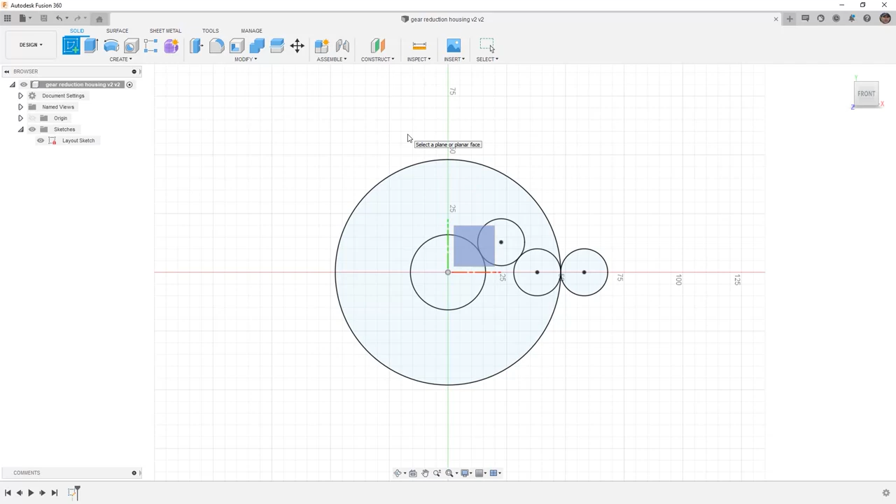In Fusion 360, we want to carry on with our gear reduction housing. We're going to get started by creating a new sketch, once again on the front plane. From here, we need to make sure that we can reference some of the values that we've already created. We still have our layout sketch shown, but we're going to use the option to create or project them as construction geometry in our current sketch.

So we're going to select Project or P on the keyboard, and we're going to select each of these items. Once we have them all selected, we'll say OK, and then we're going to hide our layout sketch. You'll notice that they're displayed in a different color. They are still able to be used for things like extrudes as solid geometry, but what we've done is we've created them as a projection into our current sketch.

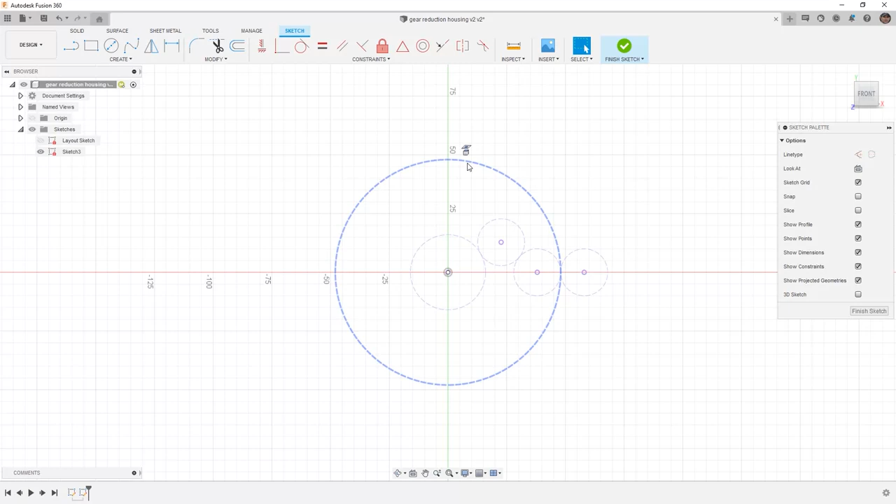If we want to turn them into a reference-only type of geometry, we can select them all and use the line type construction. When we left-click, you can see now that they're dashed, and they're projected but only as construction references. This means we can no longer select their closed profiles for things like extrudes.

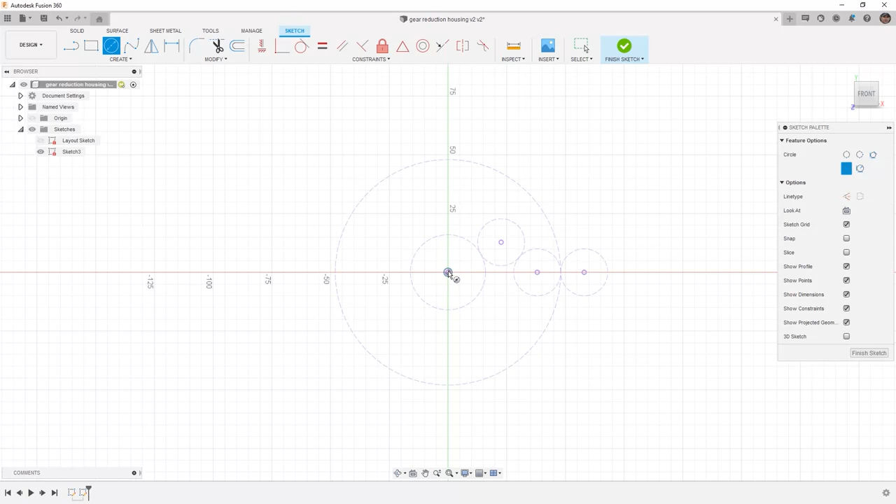This is a great way for us to bring specific sketch entities from other sketches or even solid geometry into our current sketch. This way we can begin to create the layout of our housing assembly. We're going to get started by using our center diameter circle, starting from the origin. We're going to begin dragging this out slightly larger than our projected reference. We're going to draw a secondary one larger than that.

We're going to begin again by going to the origin and drawing a circle that comes to about 70 millimeters. And we're going to draw one at the outside of our last or third idler gear. We're going to drag this one out, and it's going to roughly go through the center of the second idler gear, but we want to make sure that we don't actually snap to any geometry. So this is going to be about 37 millimeters.

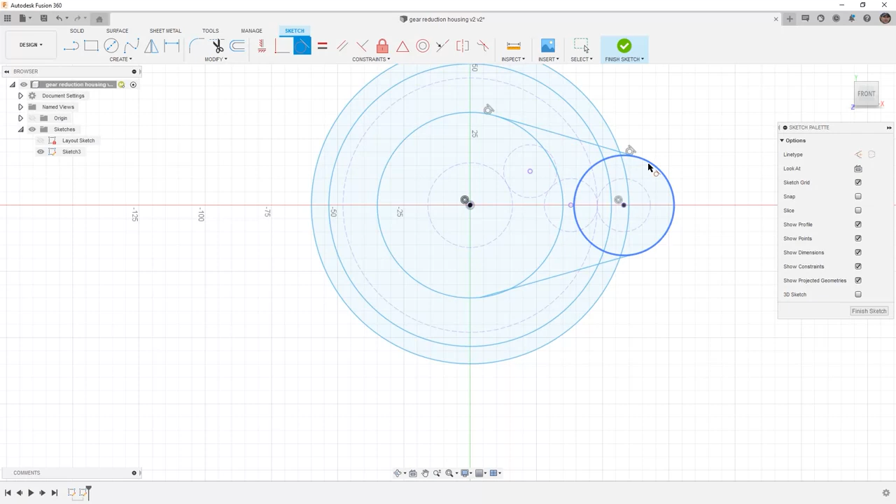From here, let's go ahead and use our line tool to go between these two sketch entities. Once again, we'll zoom in to make sure that we're not creating any additional references. And then if you accidentally select, you can right click and hit cancel and restart your line tool. But we want to make sure that we're creating tangent references between these two outside circles. We can add that as a constraint by selecting the line entities and the circles. And we'll go ahead and do this for the bottom one as well.

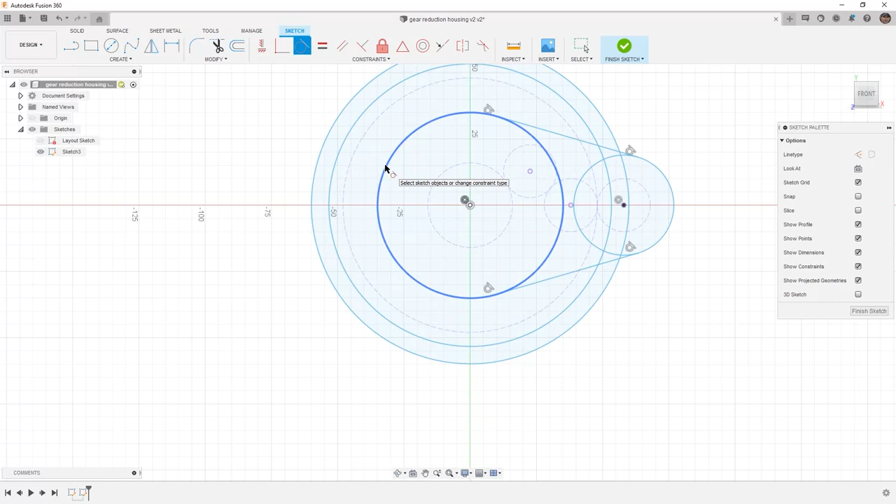This is going to be a portion of our housing that encloses the idler gears as well as our driven gear on the front side of our housing. So in order to make it as aesthetic as possible, we're going to use these tapered lines and make sure that we can include enough geometry to encompass all of the various idler gears. Now that we've got some of this laid out, let's go ahead and add some dimensions.

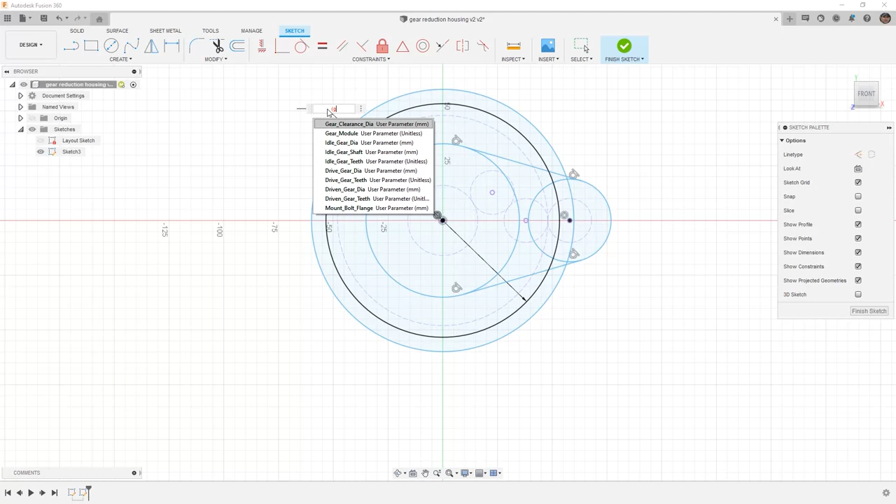To get started, I want to add a dimension to this inside circle here. I'm going to left click to place the dimension, and then I need to define what this is. In order to do this, I'm going to start by having an open bracket, and I'm going to start to type in my gear list so I can start to see what I have inside of my parameters. So remember that we're dealing with the drive gear in this case, which is the largest gear. So I'm going to select my drive gear diameter, which is 96 millimeters, and I need to add to that.

So in this case, we have a parameter called gear clearance diameter. That gear clearance diameter is 4 millimeters, and that 4 millimeters allows us to have just enough clearance for the outside edge of the teeth of our gear. Now, just enough is not going to be good for us. We want to make sure that we have a little space, especially if this housing has grease or there's any additional components that go in here. We want to make sure that we have enough clearance.

So instead of just simply adding that 4 millimeters, we're going to say plus and add more brackets. And this is going to be our gear clearance diameter value, which is 4. And I'm going to multiply that by 2. And then I need 2 brackets to close this off. Going to hit enter, and this should give us a value of 104 millimeters. So once again, we're using that gear diameter, which we know is 96 millimeters, and we're adding 2 of our gear clearance diameters to it.

The next thing that we want to do is we want to define the size of this geometry here. Now, when we do that, there's a couple different ways we can do it. Once again, we can define it as a diameter, or we can define it as a relationship to something else. So in this case, I'm going to create it as an offset.

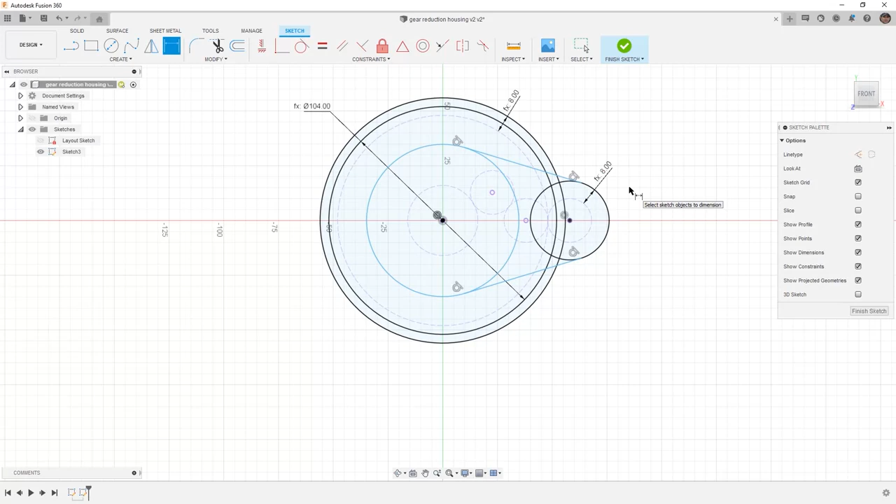So now that we have those two defined, let's go around and let's add a few more. This value here is something that we don't really have a parameter for. We're just going to have to use some of the other parameters to help define it. So we're going to start on the right-hand side, go between these two. And once again, I want to use the gear clearance diameter. I'm going to multiply that by 2, giving me 8 millimeters. Since I know that's not going to work on this side, I'm going to use that same value, that gear clearance diameter, but I'm going to multiply it times 4.

Once again, I don't really have a value for this because we're just creating a sketch that has enough geometry to encompass our idler gears. So basing it still off of that original value means that if we modify the diameter of our large gear, our drive gear, all these other values are going to update accordingly. So that's why I want to make sure that I use a relationship to that gear clearance diameter.

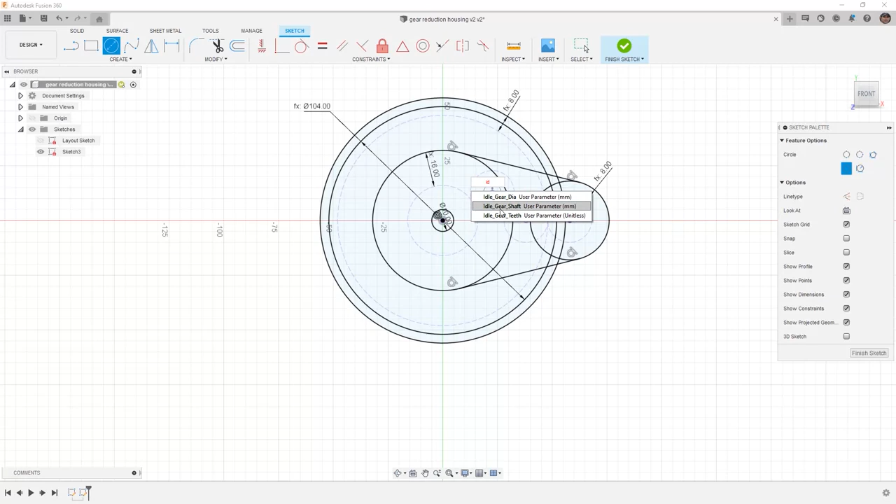Now that we have these set, let's go ahead and use our center diameter circle tool, and let's add some center diameter circles. I know that I want my input and output shafts to be 10 millimeters, so I'm going to manually enter that value. But then I want to place some more center diameter circles, and these are going to be using our idler gear shaft values. That's going to be an 8 millimeter value. And again, we're going to just go ahead and click to place that. And if you forget, you can always go back to your sketch dimensions, apply that dimension, and then simply select the correct user parameter and hit enter on the keyboard.

Now that we have our center diameter, the clearance for our shaft, and then the shaft clearances for the various idler gears, what we need to do is create the mounting point locations. In order to do this, we're going to use a center diameter circle, and I'm simply going to place one in the bottom right. And I'm going to place 2 at the exact same location. I'm going to do this over here as well. I'm going to place 2 at the same location, making sure that they are concentric, and then I'm going to hit escape on the keyboard.

In order to find the location of those, I'm going to use a line from the origin to the center point, and I'm going to do the same thing over here. I'll hit escape, and then I'll convert those lines to construction. These are only going to be references for adding dimensions. So I want to make sure that I create these references. In this case, I'll add a vertical line. We'll hit escape, and then we'll convert this to construction as well. So now we have a vertical reference, and we have this angular reference here.

Since we left this under constrained, we can move it around if we want. But in the end, it's not really going to matter where that line is because what we're going to be doing is creating a dimension from it. So using our dimension tool, going from our vertical line to this line here, we're going to drag it down and add a 45-degree value.

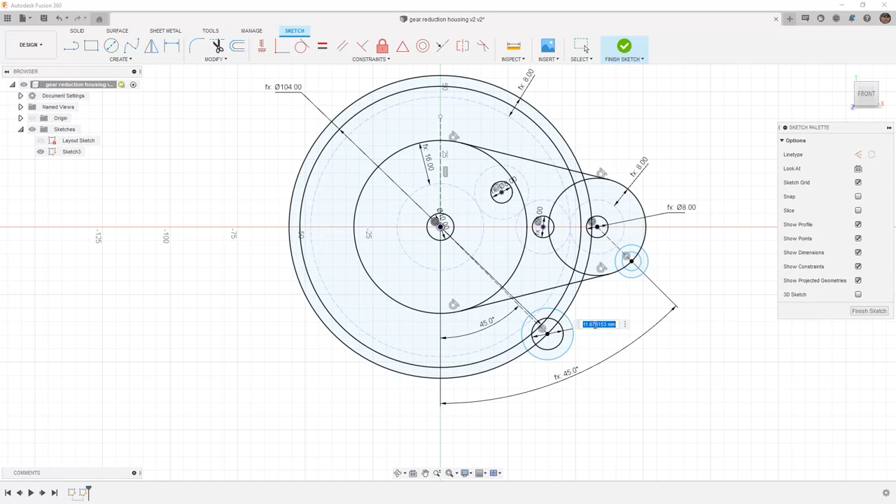Now we need to define what the diameters are going to be. In this case, I'm going to select the inside, and these are going to be our mounting bolts. So we'll hit M on the keyboard, and this is mount bolt, and I can hit enter for that. And I'll do the same thing over here, mount bolts, and we'll hit enter for that.

Now we need to figure out the offset that we need, because this is going to be the center of the bolt going through, and we need to figure out how big the rest of this is going to be. Well, we don't really know at this point. We haven't picked out hardware. So I'm going to manually enter a value of 2 millimeters. And I'm going to do the same thing over here, but I'm going to select that original 2 millimeters. So once again, I only have to change it in one place.

So I'm going to hit escape to get off my dimension tool and take a look at what I have so far. Now that I've added a few different things, I'm going to show a few more tools that can be extremely helpful when we're creating these parametric sketches. I'm going to add a couple more sketch circles over here, and I'm going to hit escape. Then I'm going to take a look at my symmetry constraint.

When we have a symmetry constraint, we need to select our entities. First, we're going to go our first entity, our second entity, and then we need to select a mirror line. And we don't have one in this case. But if I select this vertical line, notice that it moves it all the way over here. We do the same thing to the inside ones, and then we select that vertical line. What we've done is we've added symmetry across that line. Let's hit escape on the keyboard.

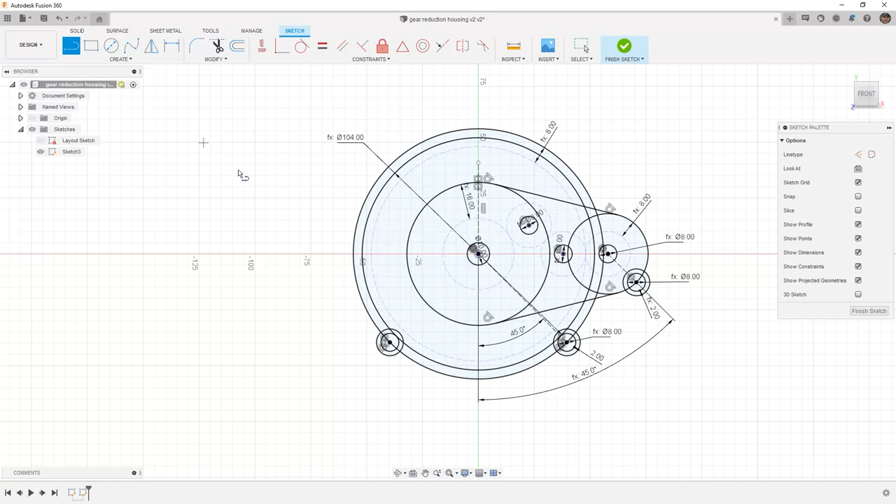Let's create one more line, and this time it's going to be horizontal. We're going to select it, convert it to construction, and then we're going to use the mirror tool. This will allow me to select all of the different elements that I want to mirror. And then I select my mirror line and say OK. And now I've created all of those fully constrained and fully defined sketch elements that are parametrically linked, meaning if I change this value to 4 millimeters, all of them are going to increase. If I change it to 2, they're all going to decrease.

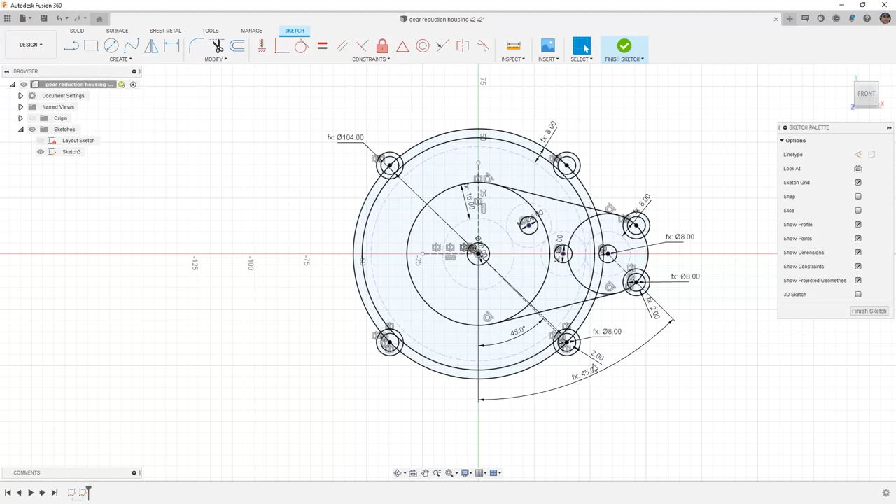Let's make sure that we finish this sketch and take a look at what we've done. We've added a lot of references, we've added a lot of parametric relationships, which means that we can always go back to modify, change parameters, and we can make adjustments to any of our values. Let's go ahead and minimize this so we can see.

If we take a look at our drive gear teeth, and I change this to 60, everything updates, but you'll notice that there are some issues because of the tangency between our idle gears. If I change it back to 48, notice that it doesn't go back to the original location, but it does satisfy everything that we've done. So making those adjustments can update our sketches, but we do have to model in a specific way to make sure that all the updates take place.

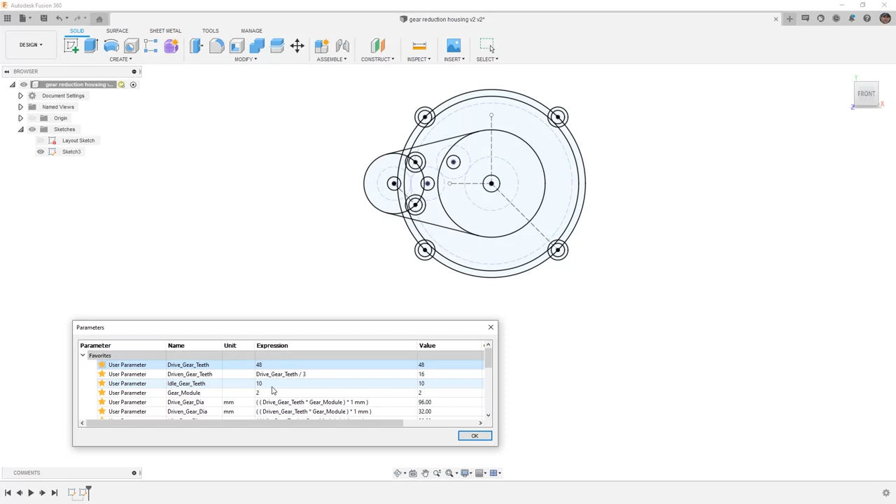Because the drive and driven gears have that 1-to-3 relationship, they'll update just fine. But our idle gear was manually entered, and that value does not change based on any of the other parameters. So if we wanted to make a true updatable, fully constrained parametric type assembly, we would need to figure out some sort of relationship to get that 10-tooth gear in there based on the distance between 2 points or diameters. I'm going to use Control Z to undo and put this thing back on the right hand side how we designed it, and I'm going to save this before moving on.